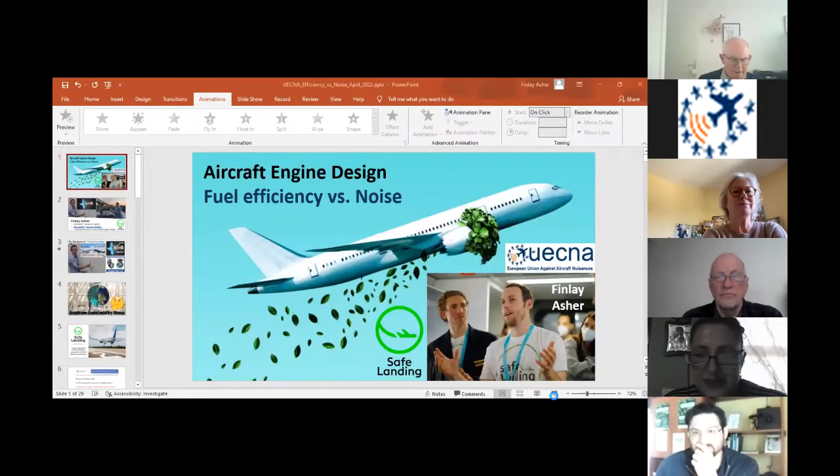Thank you. I'll just share my screen. So, the title of this talk is Fuel Efficiency versus Noise, and it's really about: can we continue to make aircraft more and more efficient and also more and more quiet at the same time, or are there going to be some challenges that come along with that?

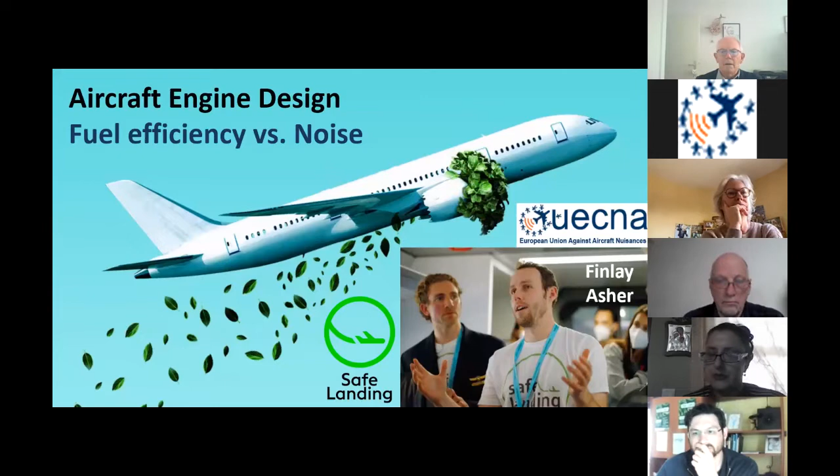I'm going to present some of my experience working on aircraft engine design, and I'll just start by giving you a little bit of my background. I'm a mechanical aerospace engineer. I now run this group called Safe Landing, which is for climate concerned aviation workers. We think that the growth of the industry is actually dangerous for jobs, and we want to see our industry telling the truth about the impact of aviation and what's possible with technology.

I've also got a YouTube channel called Green Sky Thinking, which explains a lot of the technology greenwash that you see in the industry, in some short 3-4 minute videos on different topics. I've got hyperlinks there if you want to check those out. I spent 7 years at Rolls-Royce, the second biggest aircraft engine manufacturer in the world, and I was working on future aircraft engine design.

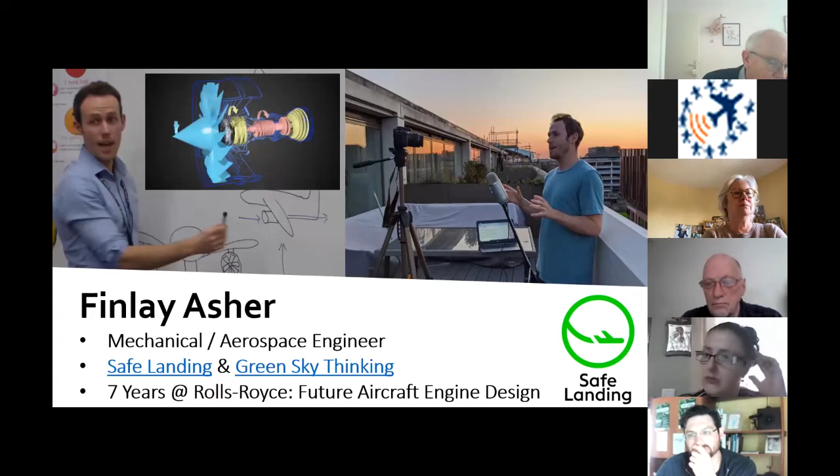Just a little bit about that - I was working a lot in future technology, in the future programs teams, looking at future Airbus and Boeing commercial aircraft in the 2030s-2040s timescale. It's called the Vision 20 team, looking 20 years into the future at what's coming next. Within that work, I was also working in system design at the whole engine level, so I got a good understanding of lots of different interactions happening around the engine and different trade-offs.

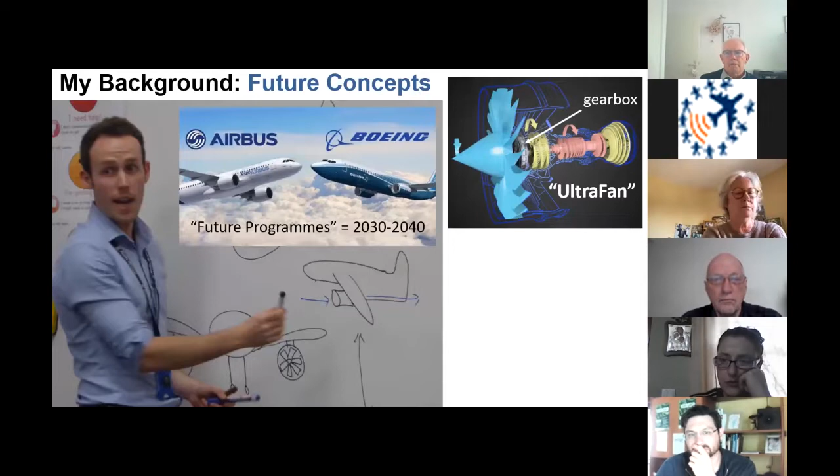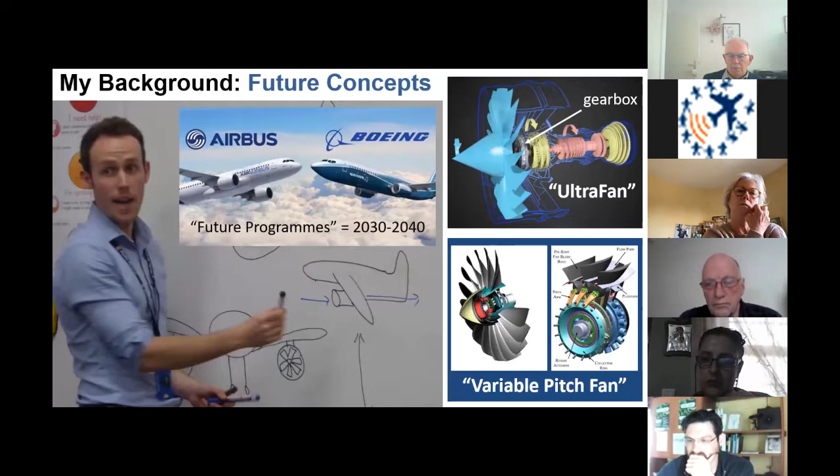One of the first concepts I was working on is called the Ultrafan, a geared turbofan that's got a gearbox in it - I'll talk more about that in later slides and some of the challenges there around noise and other things. There's also the variable pitch fan, which is fan blades that can move and change the pitch angle of the blades to optimize themselves for different stages of flight.

When I was in the company in 2019, after Extinction Rebellion and various groups put more pressure on the government and a climate emergency was declared, there was a real increase in messaging about sustainability strategy from my company and other companies in the aviation sector. I started a group internally to challenge some of the stuff that was being said in the media and to politicians, and to try and apply some reality to it and push for change from within.

I decided to quit my job about a year and a half ago, and I've done environmental campaigning since then, being involved with airport expansion, and also founding a group called Safe Landing for climate concerned aviation workers. We believe workers need to navigate a different future for the industry that's truly sustainable, and will provide secure and sustainable jobs as well. I'll share our email address and website at the end so you can check us out.

So in terms of fuel efficiency versus noise, there's something called ACARE, the Advisory Council for Aviation Research and Innovation in Europe. They've got these Flight Path 2050 goals, aiming to reduce CO2 per passenger kilometre by 75% and reduce perceived noise by 65%, relative to a year 2000 aircraft. There are also NOx targets and other things.

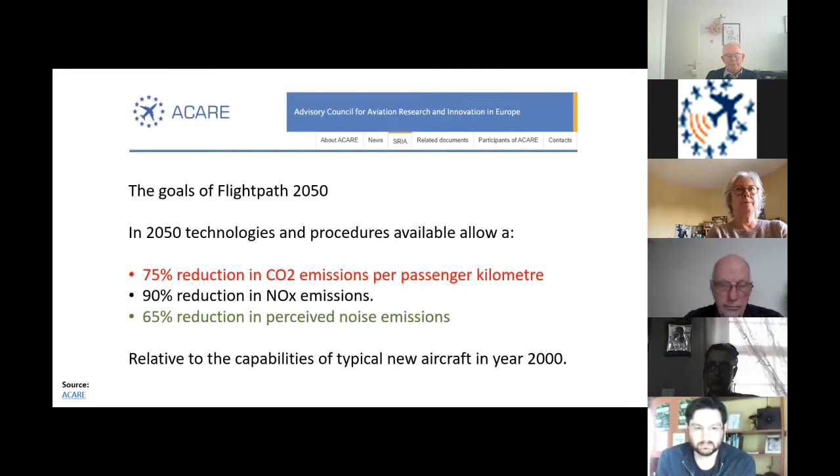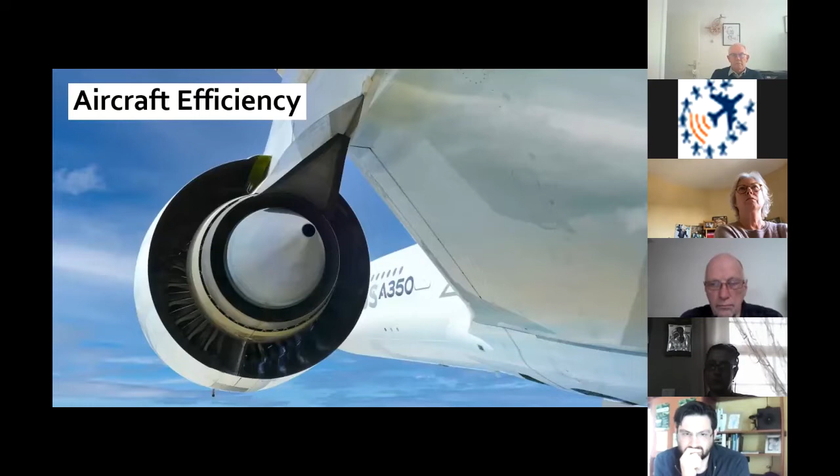So I'm going to talk through aircraft efficiency and engine efficiency. I understand some of you might not have an engineering background, so this might be new to you. I'm going to try to explain it the way I would to a new engineer, and hopefully this will make sense. You can also ask me questions at the end if anything isn't clear.

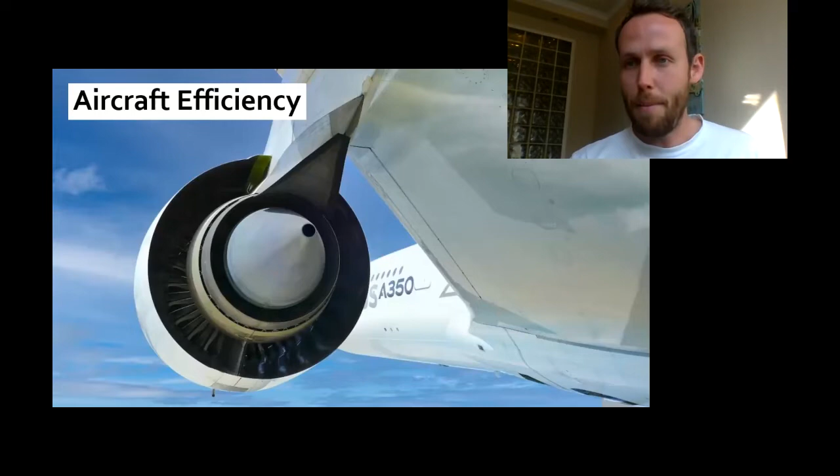The basics of aircraft design are: in order to move forward in the sky, you have to produce thrust from the aircraft, which comes from the engines, and you need to overcome the drag on the aircraft from air resistance. You also need to produce lift from the wings, to overcome the weight of the aircraft so you can climb into the sky and stay at altitude.

You obviously want to minimize drag, because then you can minimize thrust, which means you burn less fuel and can be more fuel efficient. So to minimize fuel burn, lighter materials are really good. If we use carbon fiber rather than metal or titanium, we can reduce the aircraft weight, meaning we need less lift, which means we need less thrust from the engines.

Also, more aerodynamic aircraft shapes, the wings and the fuselage, mean there's less drag, so you need less thrust to fly at a given speed, resulting in less fuel burn. More fuel efficient engines help too - to get a certain amount of thrust from the engines, if the engine is more efficient, you need less fuel as well.

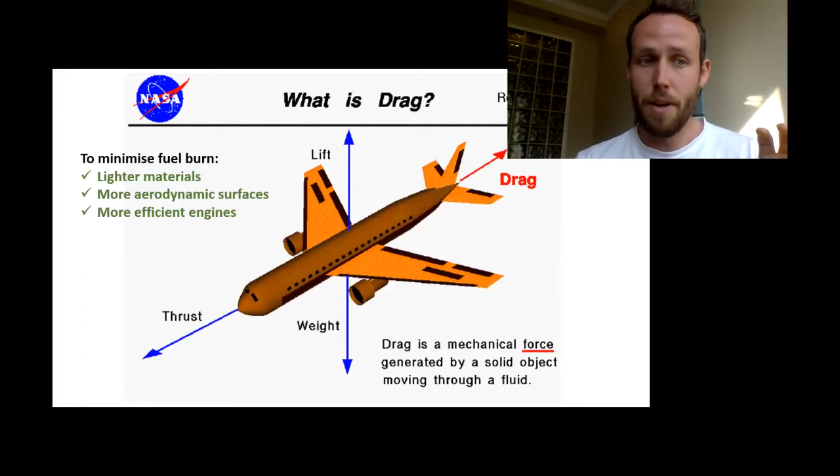So a lot of the efficiency improvement comes from the engines. It's quite a significant part of it, and that's obviously my background, so I'm going to talk through some of the things we can do with the engines and then some of the difficulties.

The basics here are: in order to produce thrust and push an aircraft forwards, you need to create some momentum, and you do that by moving some mass back the way. It's a bit like a swimmer in a swimming pool - you pull water, push water behind you, and you go forwards. It's the same with an aircraft, except it's air. You push air back the way, and that pushes the aircraft forwards.

You can do that using a propeller, or using a jet engine, which is called a turbofan or a turbojet. So, just taking you through that - in general, yeah, one of the things is...

Batteries and hydrogen have really difficult energy storage requirements, so we use jet fuel in aircraft because it has very high energy density. Within a certain mass and volume, jet fuel has a really high amount of energy. But in order to get the energy from jet fuel, from oil, you need to combust it.

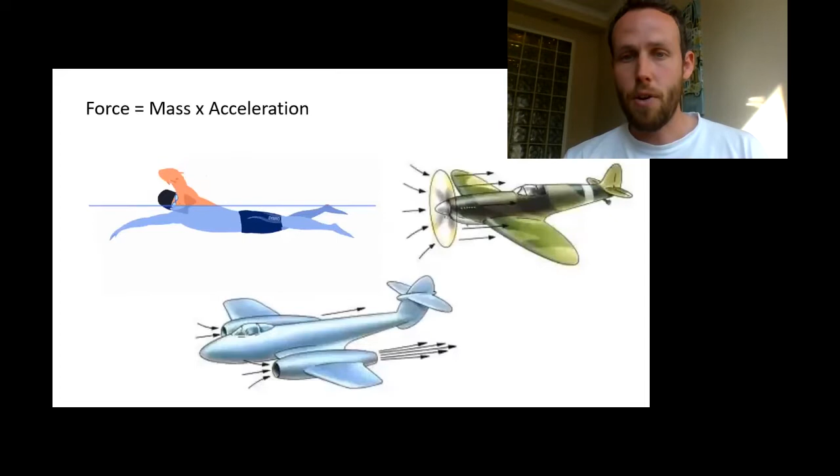You could do this like in that propeller aircraft there - it's got a piston engine in it from World War II. A piston engine has 4 phases: you have to suck air in, then you compress the air, which increases the pressure.

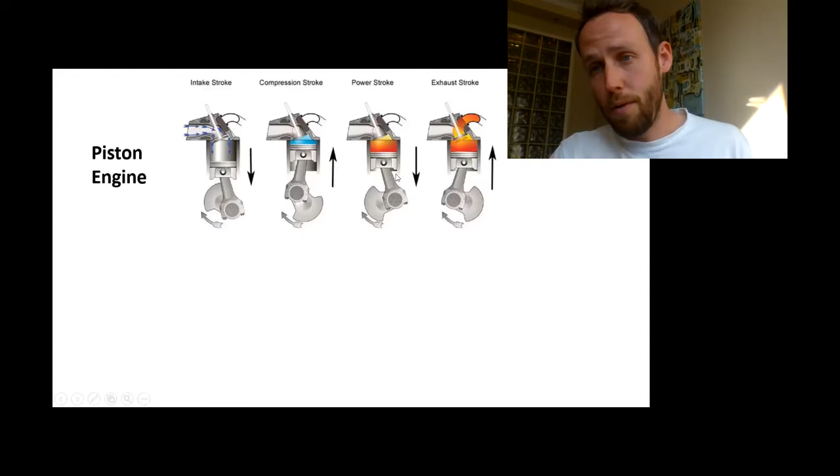Then you ignite, you add the fuel and you ignite it, and that increases the temperature and the pressure, which means you can do work and produce power. But then you need to have an upstroke again to exhaust that gas. So actually you do 4 cycles and only one of them produces power, and it's kind of quite discontinuous.

Whereas in a jet engine, it does the exact same thing. You've got an intake, there's then a compressor that compresses the air, it goes into a combustion chamber and mixed with fuel where it's burned and you increase the energy. And it goes out through a turbine, and the turbine's just there to extract some power so that you can run the compression stage. Then there's the exhaust, and you've got higher pressure, higher temperature air that you put out through a nozzle, and that accelerates the air and provides the thrust.

Now, that means that you can have a really light engine. It's got very high power density because it's continually sucking air in, continually creating thrust, and that's all good. But you've got this very fast jet stream that's coming out the back, and that's quite inefficient.

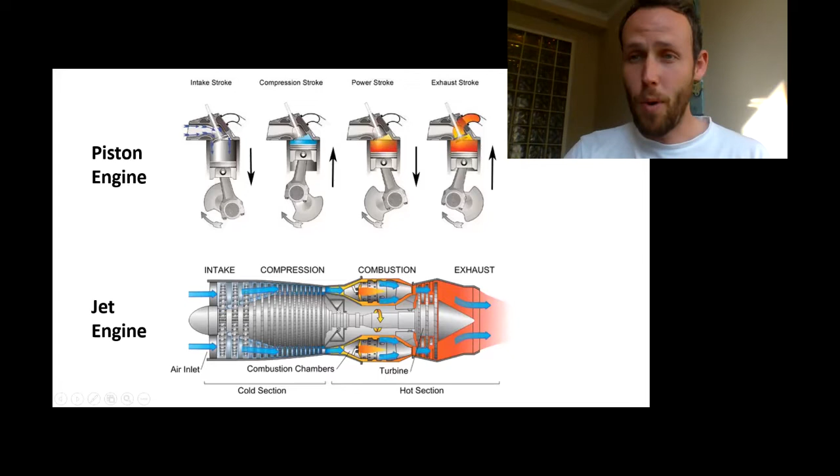It's good if you want to go very fast, but you burn a lot of fuel as well very quickly. So you see something like this in a fighter jet. It goes very quick, but it's not very efficient, and that's called a turbojet. It just creates thrust from the nozzle.

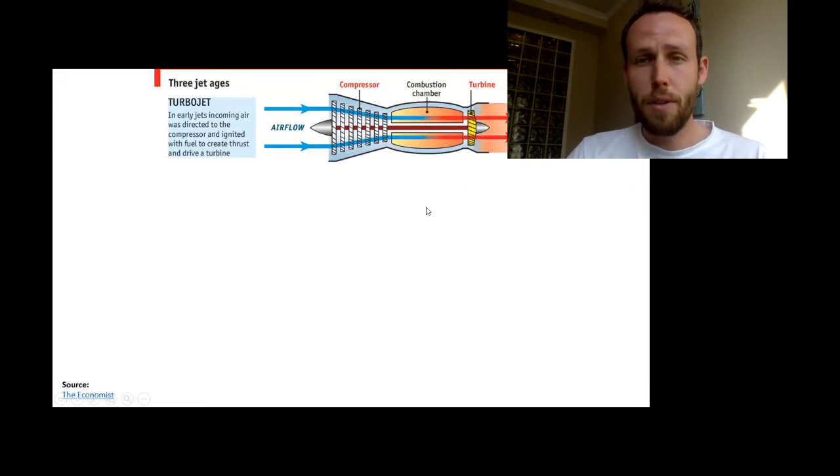Now, if you want to make this more efficient, what you do is you have a turbofan configuration, and this is what's on most commercial aircraft. So you've got the compressor, the combustor, a turbine that drives the compressor. But what you do is you actually take as much of the energy as possible out of the turbine to make the exhaust thrust as low as possible, because that's inefficient.

Instead you drive a big fan on the front. The fan goes a lot slower and it can suck in a lot more air. And because it's moving a lot more air slower, it's more efficient.

Now, the problem with this is the fan is connected by a shaft to the turbine, so they need to spin at the same time. And when you make your fan bigger, it gets faster at the tips, and you can get shock waves when it goes supersonic. So you want a fan to go slower, but when you have a fan that runs slow, your turbine runs slow, and that's an inefficient turbine.

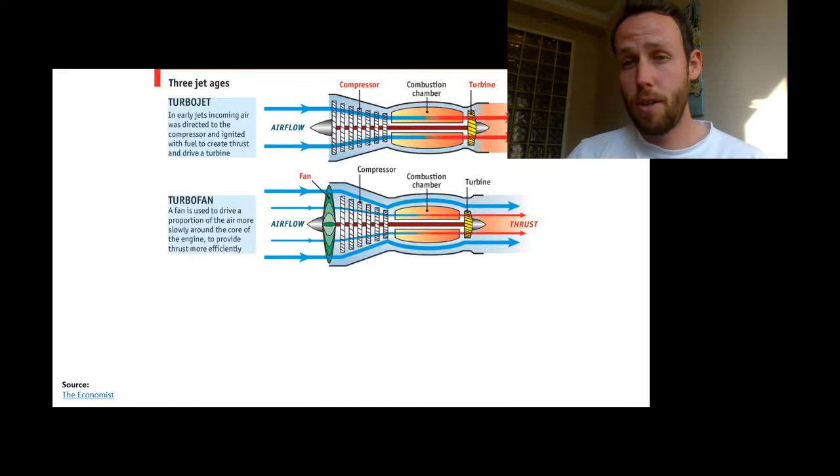So what you can do is you can have a gearbox in the middle. That means you can have a slow moving fan and a fast moving turbine, and that's called the geared turbofan. It allows the fan to rotate slower than the rest of the engine, and it can push an even larger volume of air around the engine and make it even slower. So that's one of the concepts I was working on as well.

Just to explain the basics of why you do this, this is change in momentum. So change in momentum is mass times change in velocity or acceleration. And the bigger your velocity is, that's all wasted energy. You can get the same momentum if you use a larger mass of air and move it slowly, and that's much more efficient for the same momentum, the same thrust.

It's more efficient. And that's kind of why we tend to have these turbofans, and also why we make the turbofans bigger and bigger, so we can move a larger mass of air. This is why you'll see on older aircraft there's a very small engine, and as the years have gone by, the engines have got bigger and bigger on the wing because that's more efficient.

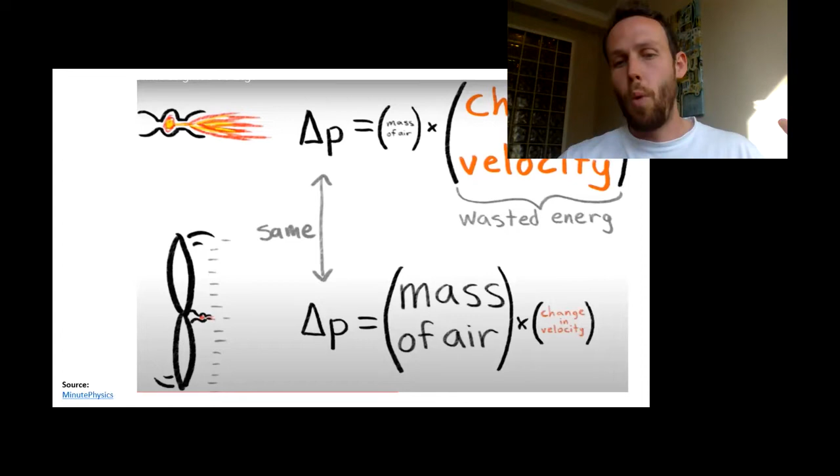So back 50 years ago, the first commercial aircraft had very small engines, and now, past the 2000s, we've got these really large ones when you look at them from the front. So increasing engine diameter means you've got an increased mass of air, and that's a better propulsive efficiency.

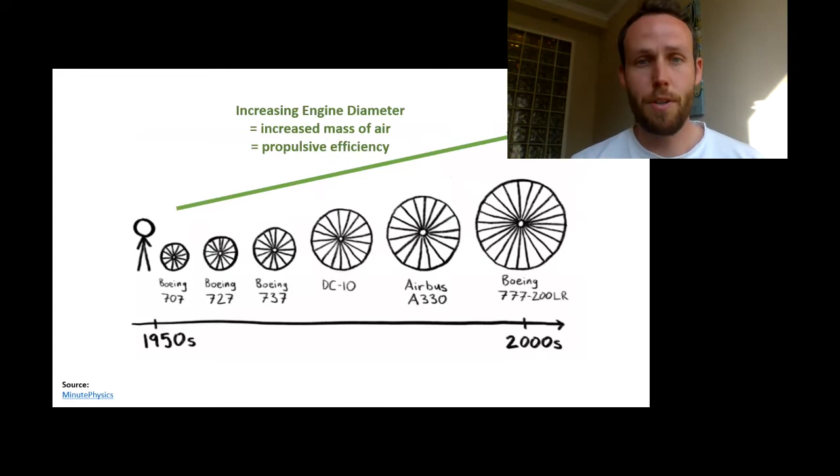It's more efficient. But there is a downside with this. When you increase the diameter of the engine, make it bigger, that also increases the weight of the engine and the drag of the engine nacelle. And when I say the engine nacelle, that's the covering or the cowl that goes around the engine. Basically there's an intake, and the intake slows the air down and pressurizes it ahead of the fan.

And that's good because it stops the losses at the tips. And then the bypass is the air that goes past the fan and past the core, and that's where most of your thrust is coming from.

So the problem is if you think about this engine as a cylinder, you make the diameter bigger, you get more air going through, but it's becoming heavier and the drag's increasing. What you get is an increased propulsive efficiency, that's good, but then the weight and drag start to cancel that out, and you get marginal benefits, and you might make things worse, and it's more expensive as well. It's a heavier engine on the wing, so you start to cancel out the benefit.

So what we do as engine designers is think, well, this is a cylinder, and we can reduce the volume of the cylinder by making the length shorter. We could try to shorten the engine intake and shorten the bypass duct to try to cancel out some of that weight and drag increase. So one solution is to reduce the engine length.

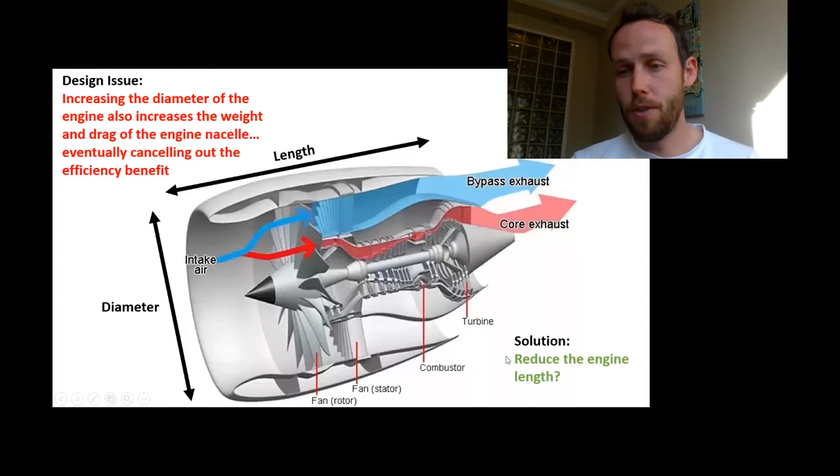But there's a problem with shortening the nacelle. Basically, if you shorten the engine nacelle, you've got a shorter engine inlet, that's this part here, and you've got a shorter bypass duct.

And that's the exact area on the engine where you put your acoustic liners, which are the noise damping panels within the engine. So this blue area here, that's your fan acoustic panels. Then you've got bypass duct acoustic panels here as well as some in the turbine exhaust. But this is what you're shortening.

So fan forward noise gets damped out by these liners, fan rearward noise gets damped out by these liners. And if you go from your current engine and make the diameter bigger and shorten the inlet, you're just shortening the area available for these acoustic liners, eroding the amount of area you've got there to damp out the noise.

So this is a bit of an issue, and the bigger we make them, the shorter it gets, the more aggressive we are with our understanding of the aerodynamics. There's quite a few difficulties there, but a big one is there's just no space left for the noise panels. This isn't really a problem we've solved when looking 20 years into the future, because they could get really short. So this is just this kind of trade-off we've got with turbofans as it is.

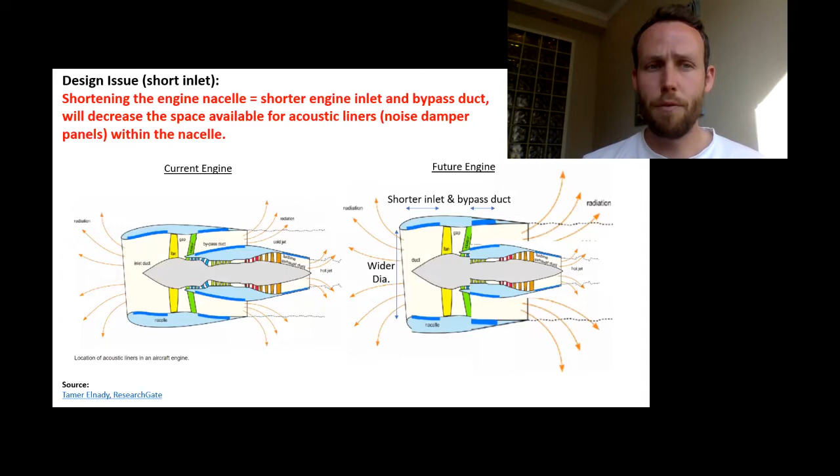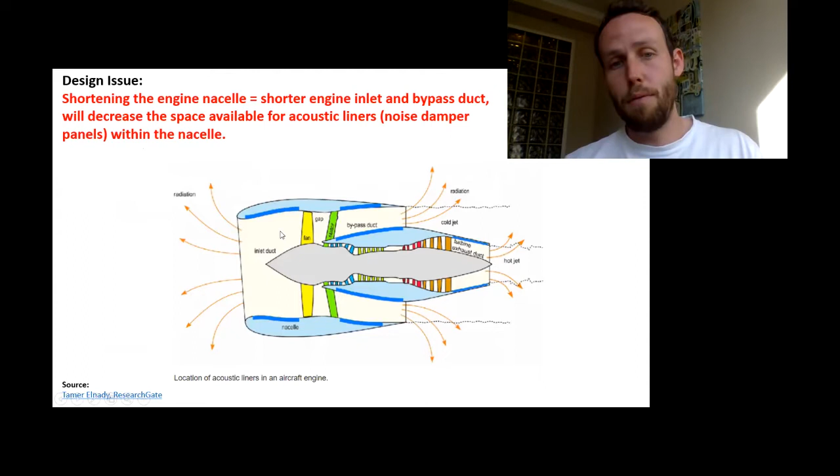This is a bit of an engineering chart, but it's showing within an engine you've got the thermal efficiency from the combustor, which is like how hot and high pressure you can get inside the core. That improves your thermodynamic efficiency. And then you've also got the propulsive efficiency from the fan and the bypass duct. So thermodynamic efficiency here gets better going up, propulsive efficiency getting better going to the right, and then you've got overall efficiency, which is thermodynamic times propulsive.

You can see original turbojets started off about 20% efficient. They've moved up through 30% towards 40% efficiency with the latest Airbus A350 that I was working on.

And they've kind of circled bypass ratios, so the bypass ratio gets bigger and bigger, meaning more and more air is going past the core through the fan rather than through the core. We're now looking at how do we go further, and there's a few different concepts I've been working on: the geared turbofan, which I showed you already, a variable pitch fan, and open rotor is another one.

I'm going to take a look at some of those. Although you can kind of see we're only going to approach 50% efficiency, and probably your absolute limit is like 50 plus with very advanced technologies. There's a limit we're trending towards, and it's getting more and more difficult to improve efficiency.

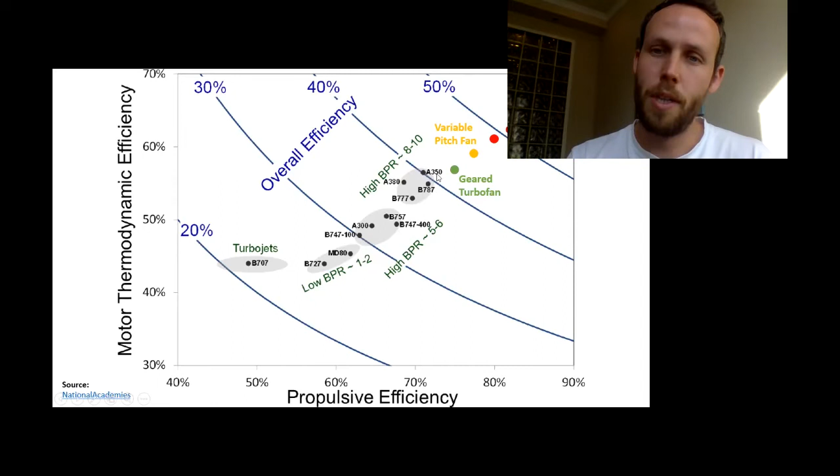So looking at the geared turbofan first, one of the problems with putting this gearbox in is you've got a very large amount of power going through your turbine to your fan. It's a huge amount of power, powering an aircraft. So even though this gearbox is really efficient, and they're looking at sort of 99% efficiency...

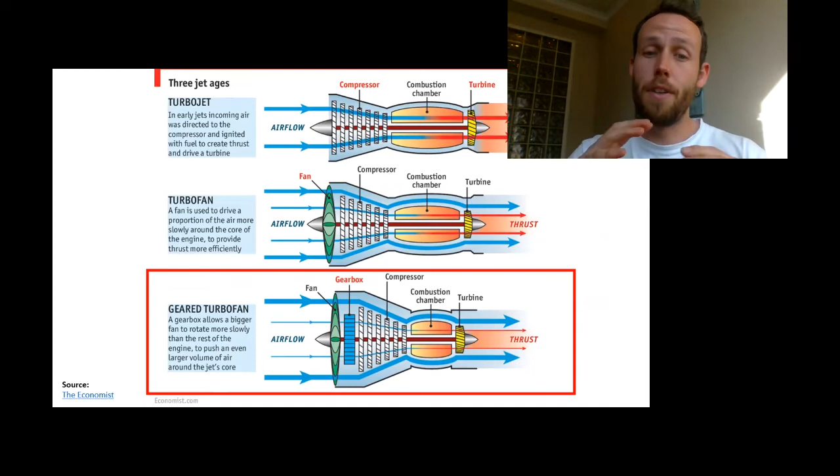...even a 1% efficiency loss creates heat, and that's a large amount of heat. That heat goes into the oil that's in the gearbox, and that adds to your oil system, and you've got to cool that oil down.

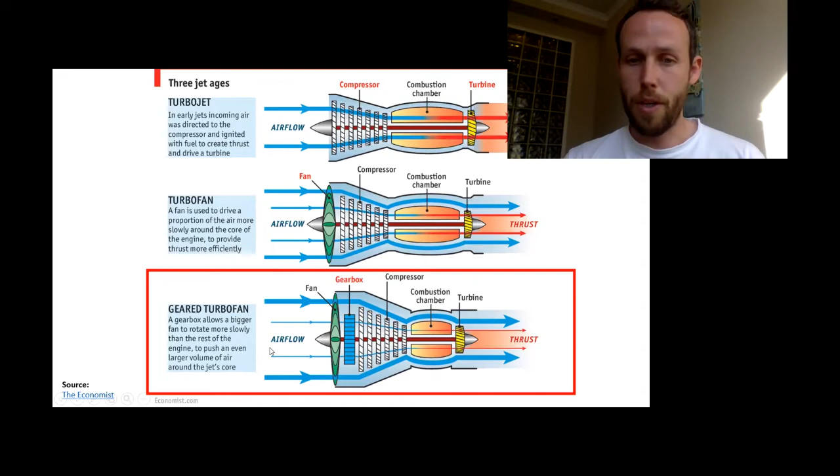If oil overheats, it can coke and harden up, causing your oil system to fail. So you need to always keep your oil nice and cool, but you've got this big new oil system requirement. Normally in an engine, there's bearings that the shafts run on so they can spin, and they're lubricated with oil that normally needs cooling. But with an additional massive gearbox, you get a high volume of low grade heat, which means you need extra air coolers.

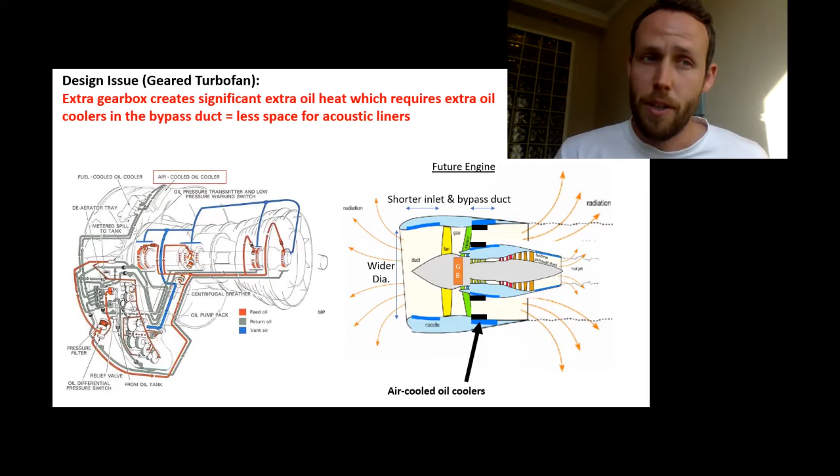I've circled the air coolers that are in the bypass duct. Switching to this simpler diagram, it basically means you need oil coolers that get cooled by the air in the bypass duct. You basically need to put these in the same place where you want to put your acoustic panels. So you've now also got this competing requirement for extra cooling, and those coolers need to sit in the exact same place as the acoustic liners. This is a big challenge as well, moving to a geared turbofan.

Next, variable pitch fan. The reason why we need a variable pitch fan is a bit complicated to explain, but a fan has what's called a working line, a region it can operate in before it stalls or surges. The bigger you make the fan, the higher the bypass ratio, the lower the fan pressure ratio. This just means it's more difficult because there's a bigger difference between the engine operating at ground level and at altitude. It's very difficult to keep the fan from stalling without varying the geometry at ground level, so what you need—because engines are designed for cruise and then operate at a higher thrust when on the ground to take off.

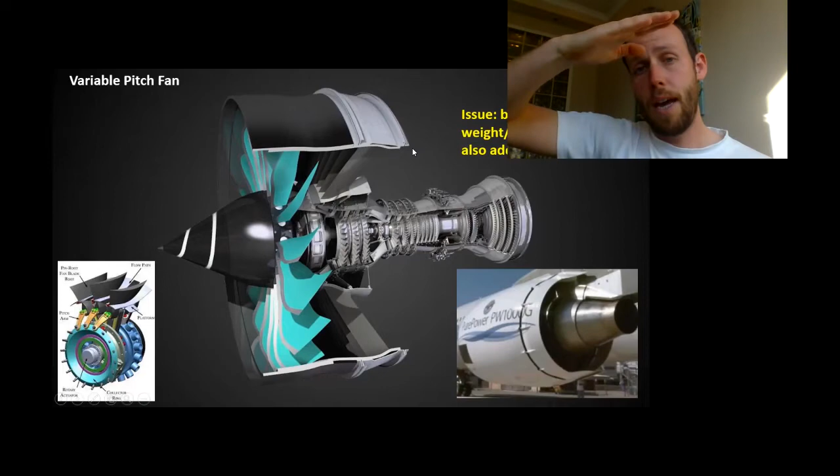What you find is it's just impossible to design the engine without providing some variability that changes the area of the flow through the engine. You can do this in two ways: you can have a variable pitch fan where the fan blades rotate, or you can have a variable area nozzle at the rear of the bypass, and it looks like this. Pratt & Whitney, when they had their first geared turbofan, thought they needed this, but they managed to just not need it. If you go any larger though, you will need something like this.

The thing about this is it adds extra weight to the engine and extra complexity, extra failure modes, and lots of design challenges, which mean we don't quite know what the best thing is. But also, anything with variability...

introduces a feature into the engine that isn't smooth and is discontinuous, and it needs to be able to rotate. So there needs to be some features there and there, and you can see that there will be gaps. Wherever there's anything like that, it's a potential additional noise source, and this will need lots of work to prove we're not just going to massively increase the noise. It will require lots of testing and lots of different configurations, and there'll be a much wider variety of operating conditions, which means it's harder to specify what the noise is. So these are all challenges as well for these future concepts.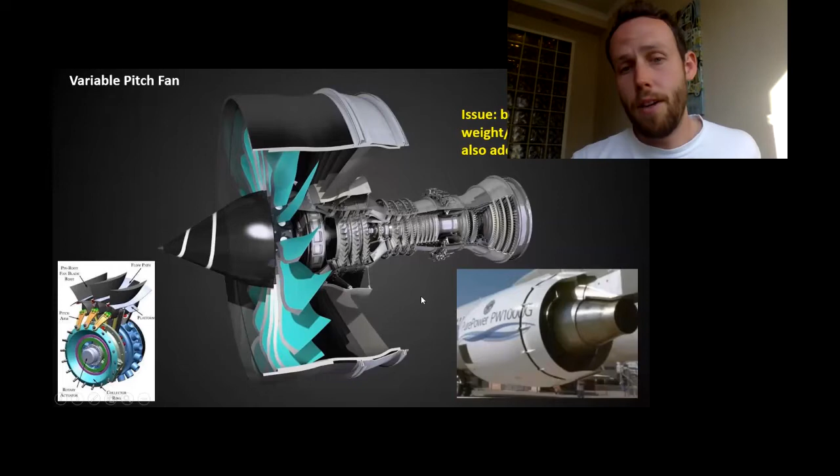As I was saying, fan pressure ratio is the thing that's getting lower and lower as the diameter gets bigger, because you need to accelerate the air less, so the pressure ratio goes down. This is a diagram from someone else, but it's just showing that as you make the propulsive efficiency greater and the pressure ratio lower, there's a limit somewhere—it might be around 1.3 or 1.4, but I think it's probably around 1.2 to 1.3—where all of these challenges mean there's just a limit to how much we can improve the turbofan as it is. That's because of the increase in weight and drag of the nacelle.

What we're probably going to do is get rid of the nacelle completely, because it's just too heavy, too large and too draggy. That's where we'd switch to an open rotor concept that doesn't have a nacelle at all.

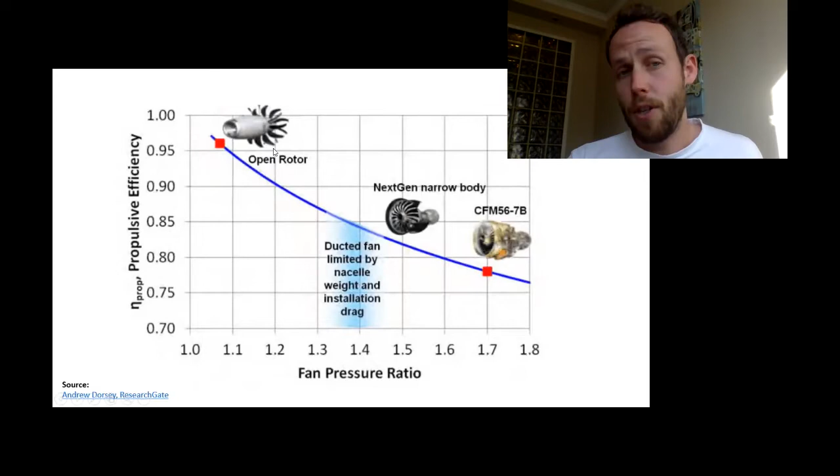So this is what an open rotor looks like. It would have no nacelle duct for acoustic panels, so there's no way of attenuating the noise at all around the engine.

It also has counter-rotating blades, and this is because if you didn't do that, you'd lose a lot of your energy as swirl, and you want to take that swirl energy back out and direct it into thrust going straight behind your aircraft. So you need counter-rotating blades, and that means you've got a really complex mechanical design inside there, with complex interactions between the blades.

It's also not clear where the best place to put this engine would be, partly because we're really worried about the noise profile of it, since there's no shielding and no liners. We might want to put this engine above the body of the aircraft, or above the wings, or above the fuselage, to shield the ground from the blades.

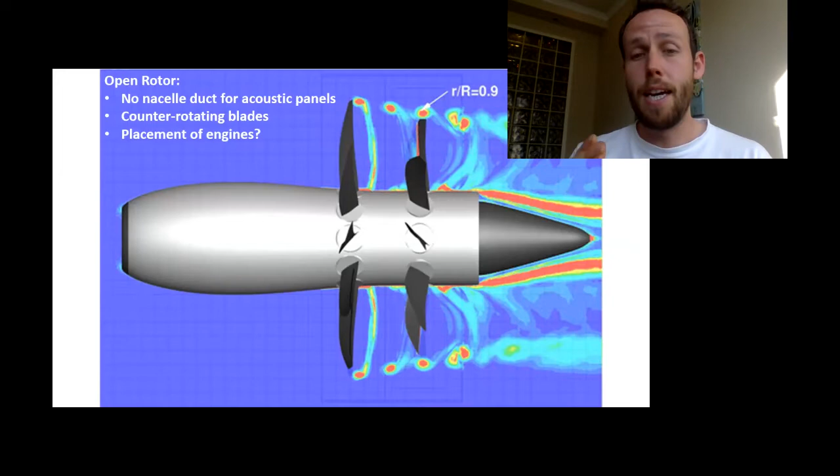The other concern is if one of these blades breaks. Normally the nacelle provides a shield that contains the blade. We don't have this, so often when you see this design of engine, it's positioned somewhere else on the fuselage, away from passengers, so that in the failure case where one of these blades fails, it can't go flying into a critical part of the fuselage.

So yeah, there's quite a lot of complexity that comes with this design, with a lot of problems that are still to be resolved. You can see Clean Sky, the EU funded program that's pushing open rotor, really highlights noise and vibration problems of it. When this concept was developed in the 1980s, this is one of the reasons it was shelved, because of the high noise profile.

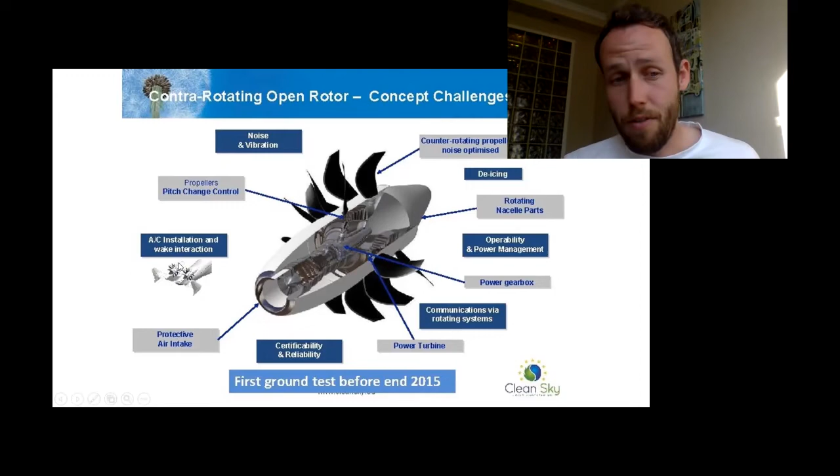And the other difficulty, as I was saying, is where to install it on the aircraft, and how the complex wake interacts with the aircraft, which is another thing that can create noise. So yeah, the final thing really is just where to put this engine.

I'm just giving you a few examples here of different aircraft concepts, and really aircraft designers haven't figured out the best place to put them. There'll need to be a lot of testing before we can decide what the optimum place is, but a big factor of this is the noise.

You can see that on this concept, they put the engine between the tail fins of the aircraft, and this is to try and shield the ground from the blades. Equally here, this one is above the fuselage as well, and this is all because of the noise issue, trying to basically create a shield between the engine and the ground by putting the aircraft in the middle.

But also they've tried with a high wing, a low wing, at the back of the fuselage, at the front. You can see some of these are a pusher configuration with the blades at the back. This one has got a puller configuration with the blades at the front. So it's really uncertain, and when you've got this uncertainty in terms of configuration, you can't really start doing the detailed testing to understand the noise profile and all this sort of stuff.

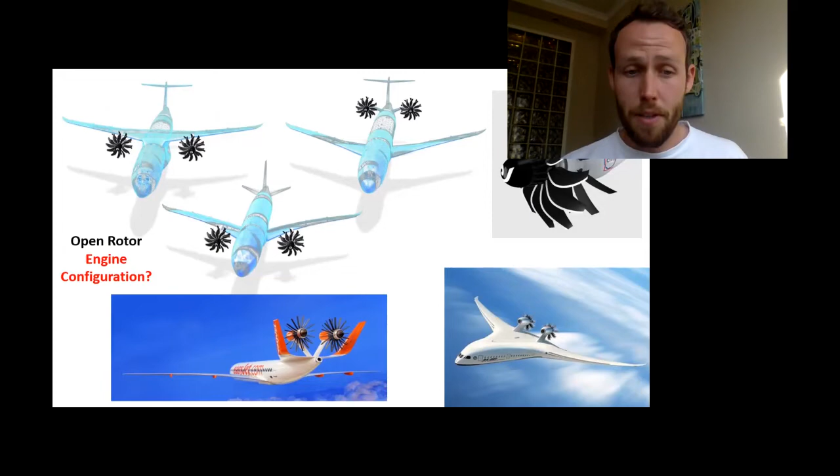So yeah, but this concept is being relied on by a lot of the sustainability strategies for the industry. I'm just going to give you a summary of what I've talked about, try and wrap it up, and then we can go to questions.

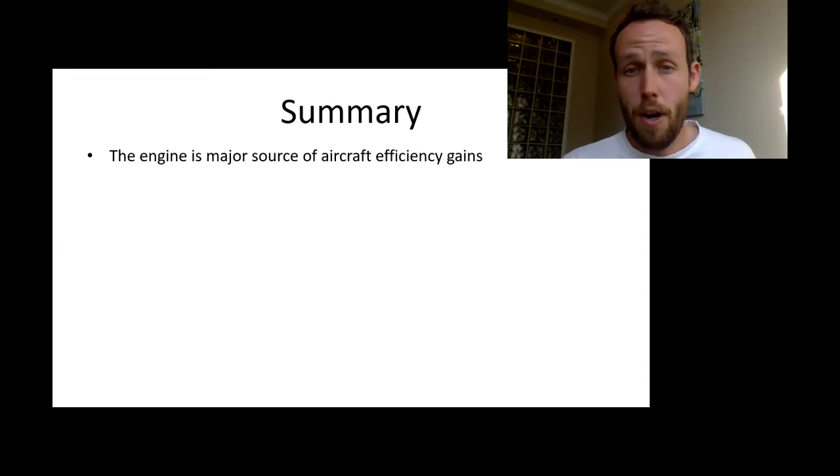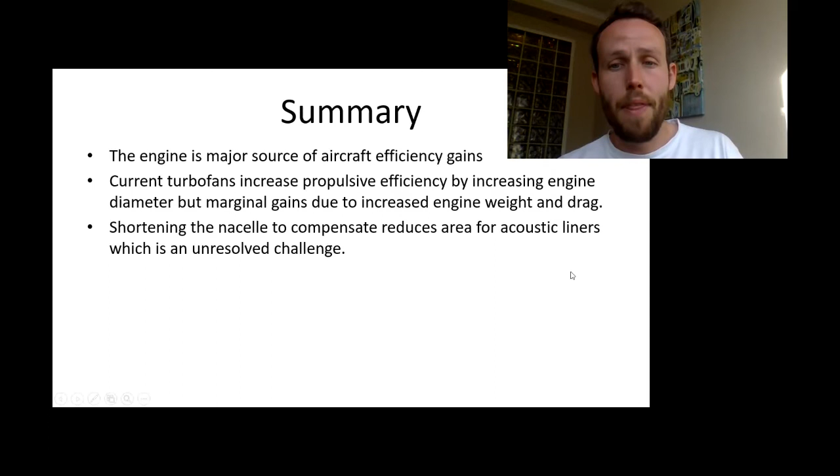So the engine is a major source of aircraft efficiency improvements. Current turbofans increase propulsive efficiency by increasing the engine diameter, but there are only marginal gains to be had because we increase engine weight and engine drag. We can shorten the nacelle to compensate, but that reduces the area for the acoustic liners, and that's an unresolved challenge that hasn't been solved yet.

And geared turbofans have an additional challenge because they've got extra heat exchangers which get in the way of our noise liners. Then the variable pitch fan and variable area nozzles could be additional noise sources, and they will be required below a certain fan pressure ratio in the future. It'll be difficult to get away from using them, and that's an additional noise source.

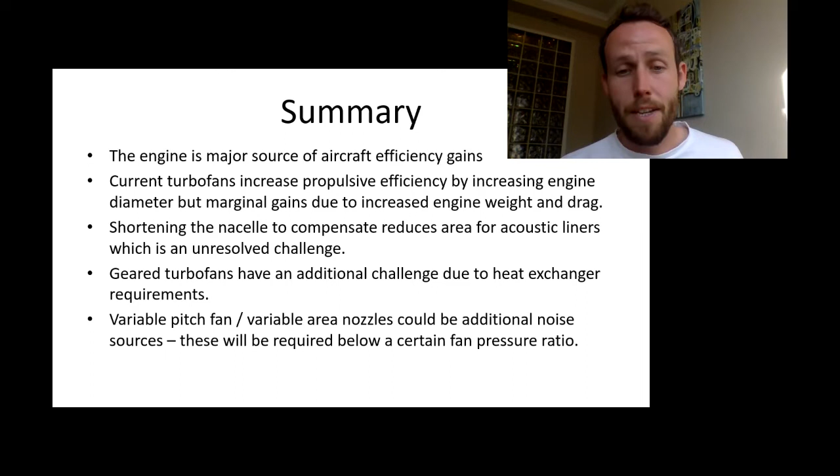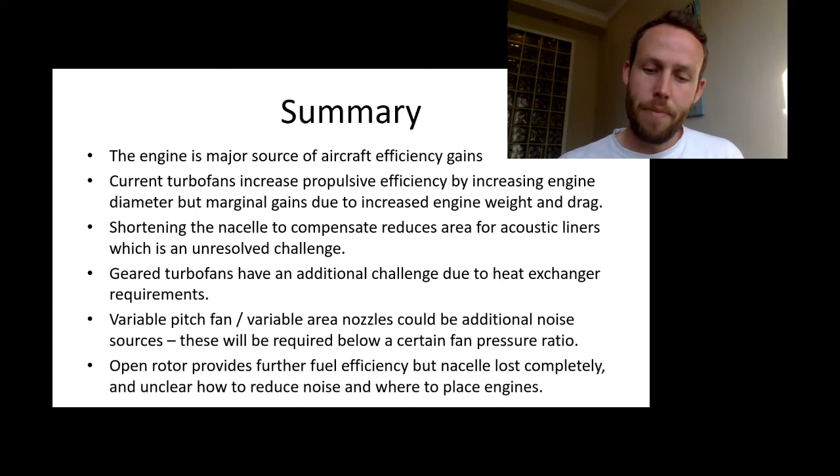And then open rotor can provide a further fuel efficiency improvement, but we lose the nacelle completely, and it's unclear how we then reduce the noise and where to place the engines. So there's kind of these unresolved challenges. And then I thought I'd just give you some other thoughts as well.

There's a tendency at the moment towards stretched aircraft, making an aircraft design as long as possible to fit in more passengers and higher load factors, which means for a given aircraft there are more passengers in terms of filling every seat, but also the seats placed as close together as possible. Particularly low-cost carriers like Ryanair and EasyJet really try and shove everybody in economy and get as many people in as possible.

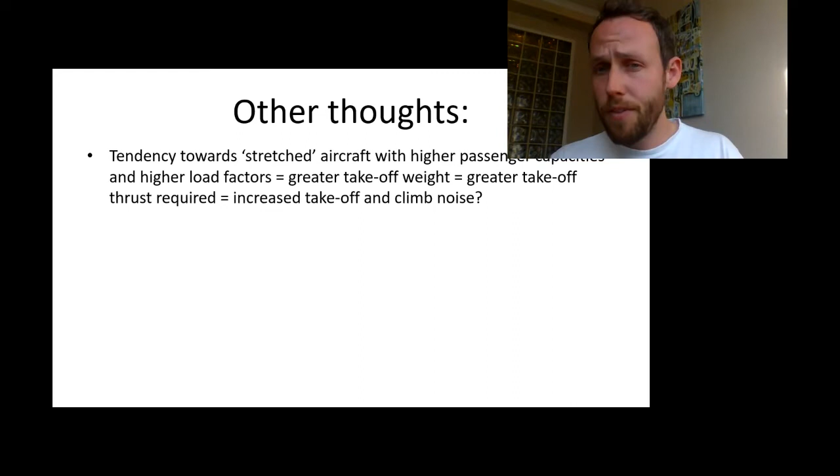That means that for the same aircraft taking off on the same flight, it will have a higher takeoff weight, and greater takeoff weight means we need higher takeoff thrust, which will mean increased takeoff and climb noise. So even though the same aircraft might get quieter side by side, there's this change to airline operations that's cancelling that out and increasing the noise again. That's worth thinking about.

I also think there's a tendency towards longer range flights, because we've become more fuel efficient, we can fly further. So the average flight is going further and further. But that means if you fly further, you start off with more fuel on board at takeoff, so you've got a greater takeoff weight and greater takeoff thrust required, which probably means you increase your takeoff and climb noise.

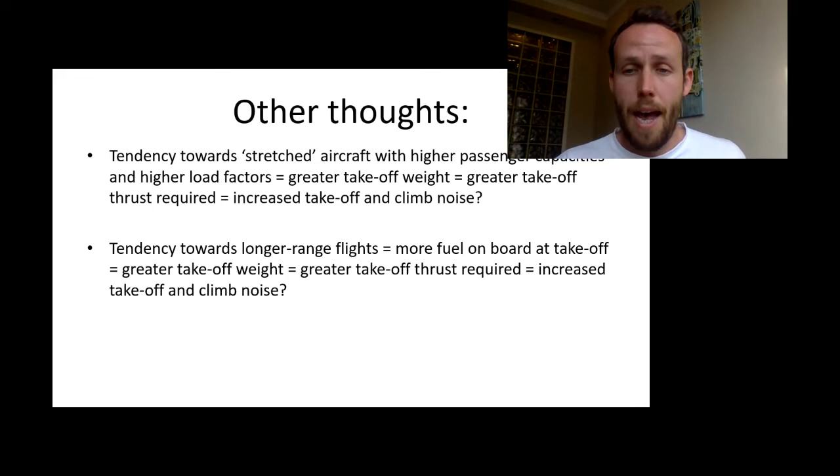Then the final thing is we've got higher day temperatures. Because of global warming, the average temperatures on the surface are becoming higher, and that means we've got a lower air density at ground level. That means you need to run your engines higher to get the same engine thrust, because you need to suck more air through to get the same mass flow, to get the same thrust. That likely means we'll get increased takeoff, climb and descent noise as well.

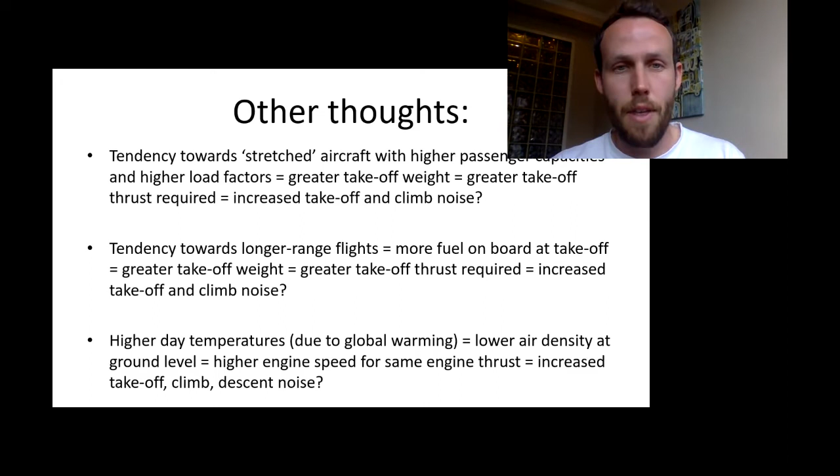Those things probably need explored in more detail, but I just thought if these things are being discussed with the industry, these are good questions to ask them. I just thought I'd include those as well for completeness.

So yeah, that's the end of my presentation.